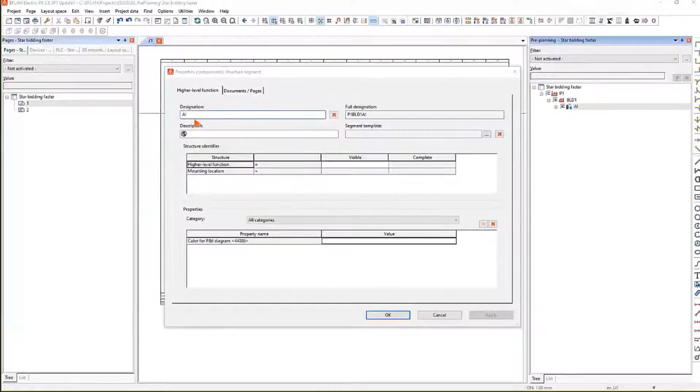In my plant P1, I'm going to create a new structure element. It's going to be a set of buildings. So it's going to be building 1. And in this building 1, I will add another structure, which will be area 1, for example. You can easily modify the properties after they've been used if needed. And in building 1, I'm going to have an area 2. And if you want to, you can even copy and paste an area 3 in there, and the system can automatically help you create a structure very easily. So this is a way to organize the data that you need to create your controls design project.

In area one, I'd like to define a motor system. I need a motor control system, so I need to define that and capture the information associated with it. So in this case, I'm going to create a new planning object. A planning object can really be anything. It can be an actuator, it could be a converter, it could be a machine, it could be a pickup, or you can customize whatever you want. It could be an enclosure, it could be a valve manifold, it could be a conveyor system, it could be a robot, really absolutely whatever you want it to be. You can organize it however you need it to be.

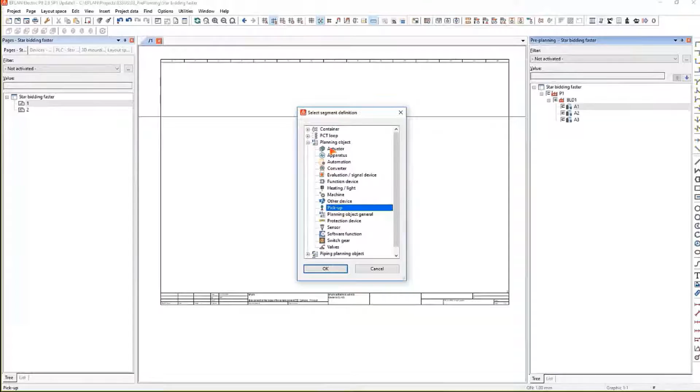So in this case, I'm just going to take a motor, and this motor, I'm going to give it a name, for example, DRV1, drive 1. And this is going to be specific for my conveyor number 1.

In this planning object, we see these different attributes: expenditure construction, expenditure planning, expenditure software. What do these mean? These are to capture times. For example, how long is it going to take to assemble and build that motor onto my system? How long is it going to take to plan that particular motor? And how long is it going to take to program it? And finally, calculation value is how much is it going to cost?

So let's say for this motor, I'm not going to consider just the motor. I'm going to consider the motor plus the cables, plus the terminals, plus the variable frequency drive, and the protection devices all together. And putting that together is probably going to be at least an 8-hour process. So I'm just going to say 8 hours here. For planning the motor, it's probably going to be 2 hours. You have to size it and figure out how long the cables are going to be.

And then to program it is probably going to be an hour to identify the function block and put it in the system. And calculation value, those types of motors with the drive, with everything, it runs at about $8,500, and I can capture a value. Now that I've done this, I can use that drive, and for example, I need one for my area 2, my area 3, so I can easily copy this. I can paste it, and I can paste it in my different areas.

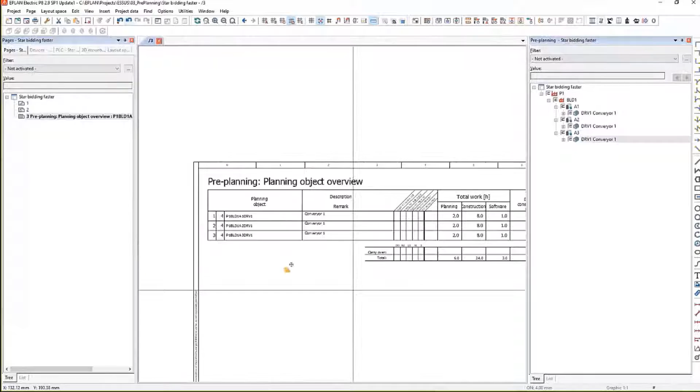And now what's happened is these 3 objects that I created have been summarized in a report, which is my planning object overview. It could be my quote. I've got my 3 conveyors, I got my planning time, I got my construction time, and I've got a summarized value here at the end for total value of my system. So this already gives me a really good idea in regards to the quote that I want to put together. And if you want to add another 10% on top of that, then that could be your final number if you wanted to.

Additionally to that, each one of these drives can also carry I/O information. So I'm going to select all these drives since they're very similar. I can add, for example, PLC I/O. I need an output to start the motor, so it's going to be a digital output. I'm going to start it with contactors, for example. Then I'm going to add 2 more inputs or 3 more inputs for motor start, motor stop, and motor fault.

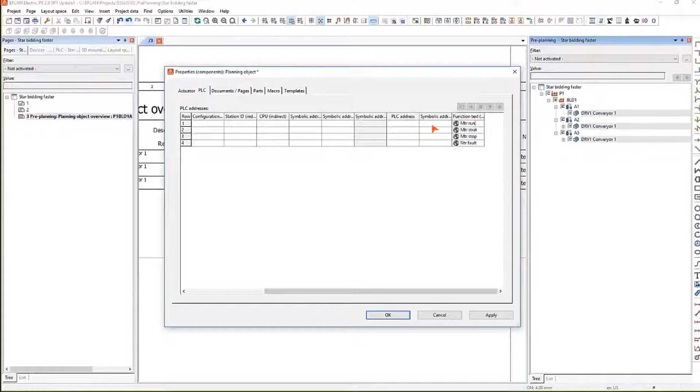So if I want to, I can add also a text: motor start, motor stop, and motor fault. And here I could just have this motor run, for example. So these would be the function text associated to these elements. Now, if I ran my report again, I'm going to update this report. And now look at that. It added all of the signals needed for each one of these objects, giving me a total number of signals.

So right then and there, I don't have a drawing yet. I just have an understanding of the control systems that I'll need. I also have a number of IOs or signals needed for that particular system. So there I can already start sizing my PLC system and maybe go to the various different PLC vendors and ask them what type of PLC could support that type of system.

So there you can see that pre-planning can be very useful in structuring information, but also capturing certain types of information or data associated to the bidding process, allowing you to bid faster by collecting the information faster and making sure that you've defined it faster. And again, if I had a second building, I could simply copy and paste it, put building number 2.

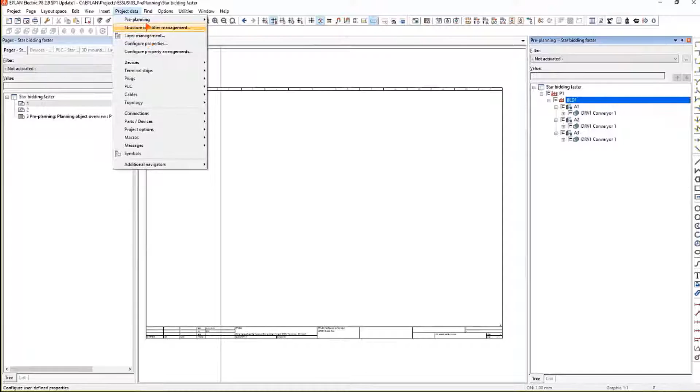Another benefit is we have what we call templates, pre-planning templates. These pre-planning templates can allow you to store a particular drive, like this drive configuration. I could store it in my library of templates. So then when I decide to create a new project, let's say I don't have any conveyors, I'm going to delete these here.

And I want to start defining my conveyors, I can go to my library with all of my templates in there, and I can simply drag an actuator in here for A1, take an actuator, put it in A2, take an actuator, put it in A3, and same is true here. I can just run a report, and there you go. You have your quote already done.

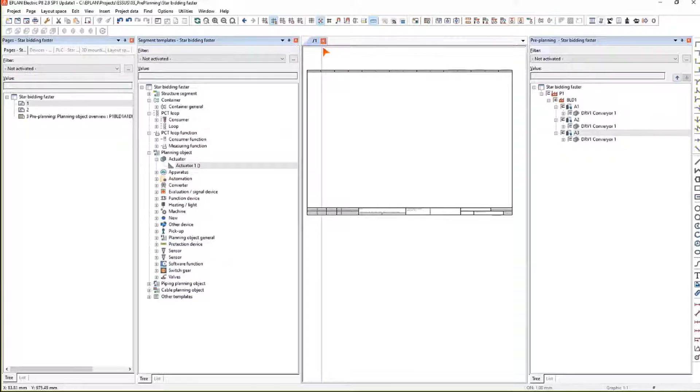So using templates with all of the data already pre-stored can be very useful to quickly and easily put a quote together and generate the information needed for bidding. That is using pre-planning for its structure, for its objects, without doing any design. Let's take a look at a design approach. So again, I'm going to delete all of this. And I'm going to remove this particular page.

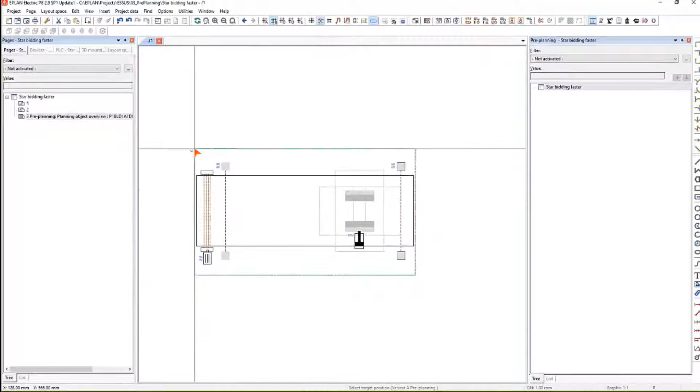And now let's say I need to design a conveyor system for a manufacturing facility. I'm going to start with a conveyor, so I can use a conveyor macro. So now what we're using is graphical objects. This macro contains the conveyor, a motor, 2 light barriers, and a cylinder. By using my tab key, I've got 4 different variations, vertical and horizontal at different positions.

So I'm going to place one system right here. I'm going to place another system right there. And you can see as I place these graphical systems, the system logically captures again the information associated with them. So in this conveyor system here, you've got a cylinder, you've got 2 sensors, and you've got your motor.

And if I look closer to these objects, you can see that the information behind them carries all the information needed for quoting, how much time it's needed to build, to plan, to program, and what it's going to cost. Now I'm going to add a couple of more devices, such as a turntable. I'm going to place my turntable right here.

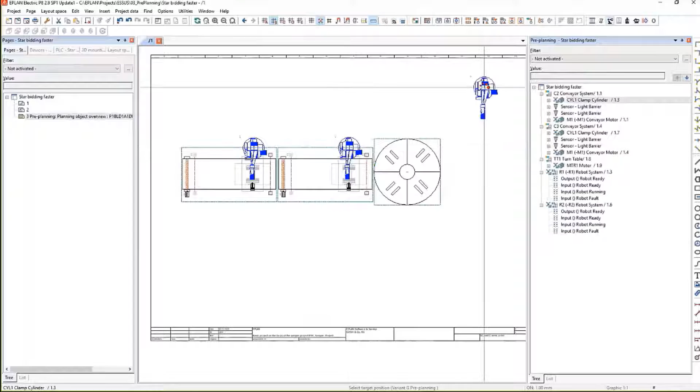I'm going to add a couple of robots. So I've got a robot system here. Using the tab key, I can orient the robot however I need to. I'm going to put one here. I'm going to put one here. And using my tab key, I'm going to put an oriented robot right here and another one down there. So now what's happening is you're doing a graphical pre-planning.

A graphical pre-planning means you're using graphical objects, not just graphical objects, intelligent graphical objects that carry a lot of data with them. And this data can be data regarding bidding or quoting aspects, but also information regarding the PLC layout.

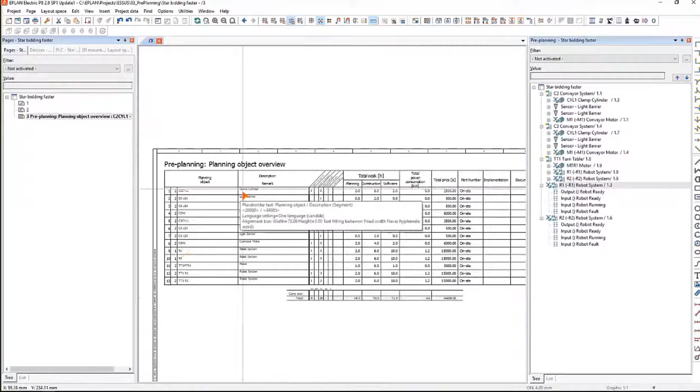So if I just took this system and I decided to go to my pre-planning report, and I would update that report with the new information, now you could see the entire quote or the bid for that particular system. You'd have your cylinders, your light barriers, your conveyors, your robots, and everything is added up to a total sum here at the bottom. And you can see here $84,000 for that system with a couple of robots associated with them.

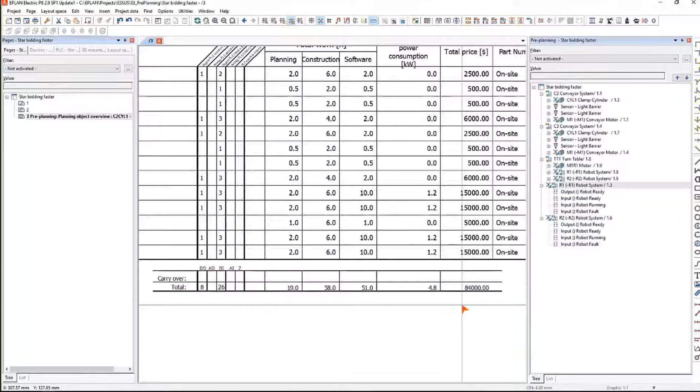So this is just to give you an idea how pre-planning using intelligent graphical objects can really help you leverage speed and accuracy in quoting specific control systems. Now, the huge benefit is not only it helps you to quote it, but in addition to that, if I look beyond the robot system as an object here in my overview, I can see I have macros associated with it. And these macros can show me what the circuit diagram would look like for a schematic implementation.

So not only I have the object for quoting and bidding, but also once I've won the bid, because I'm so accurate and efficient at it, I can also straight away use the information to drive my detail engineering all the way to the panel build and panel manufacturing aspect. So you can add as many different types of blocks.

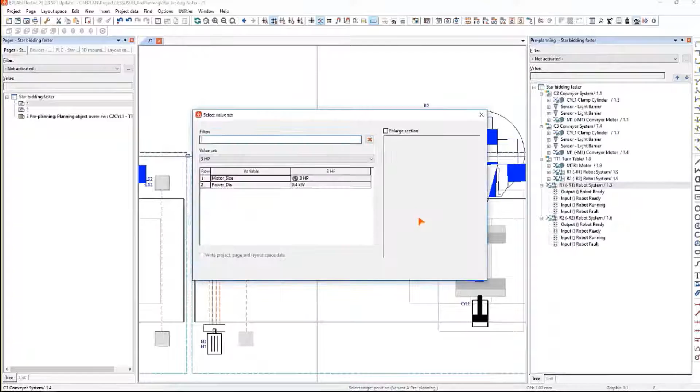Like, for example, I've got a motor here. If I need to add an additional motor on that particular segment, I can just pop it right here and assign that motor to my second conveyor, for example. Just take it there and hit OK. If I had to choose the size of the motor, I could size it right here. And again, that motor could come with a lot of pre-planning information.

I can also select a cylinder. Here's a pneumatic cylinder, and this pneumatic cylinder could also be positioned where I need it graphically, and it also logically is added to the tree or to my structure. I could have some sensors, for example, I need some proximity sensors, and I could just simply drop them here and here, wherever I need them for my particular application.

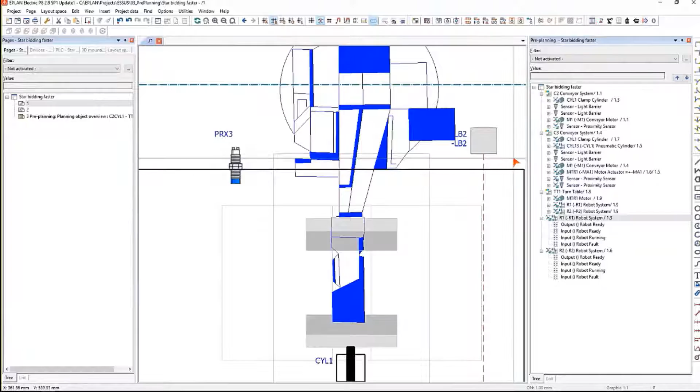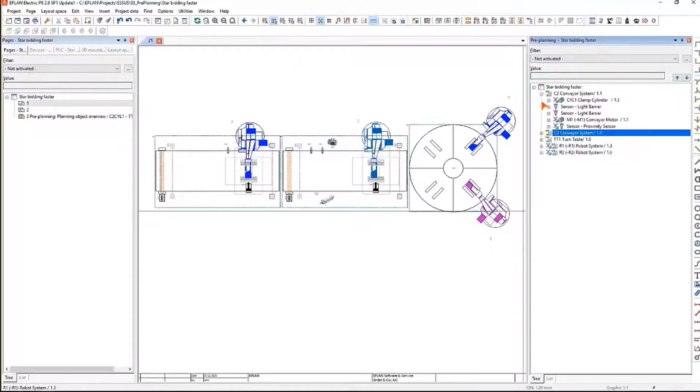So a graphical pre-planning is not much different than what you might be used to today using CAD applications. However, there's a huge difference because the CAD blocks or the graphical blocks, as you understand them, now carry a lot of data with them. And not just bidding data, also graphical data, also logical data, PLC data, and wiring data associated to them. So a lot of information is now tied to these objects and can help you generate quotes a lot faster, a lot more accurate.

And on top of that, by doing that, not only do you have a quote, but you've also got an initial view on what the system could look like. So conversations with your customer can be at a completely different level where he can visually see what you mean by the quote that you just provided, making the whole process a lot easier. So this kind of summarizes the approach of how the Eplan pre-planning solution could be used to help companies or engineering generate quotes or capture quoting information a lot more accurately and a lot more efficiently.

And again, by the fact that you store these objects in templates, that helps you to remove the experience aspect where you have to have that person that's done it multiple times and knows exactly the ins and outs to be able to quote the system. The ins and outs of that person are stored in that particular block in the actuator, and all of the information is there, so the user can just drag that information onto the drawing and leverage that data from there on forward, knowing that based on the library it's accurate.

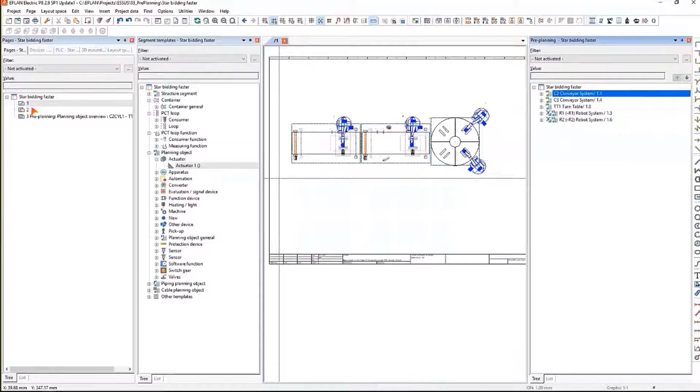Simply, what other software packages are, Eplan in a sense combines into one platform. So pre-planning is one, where you have a specific structured tree that allows you to create objects and intelligent objects up front. The second software tool is Eplan Fluid. In this same environment, I'm just going to create a new page, and this page is going to be page 5, but it's not going to be a pre-planning page. It's going to be a fluid power schematics page.

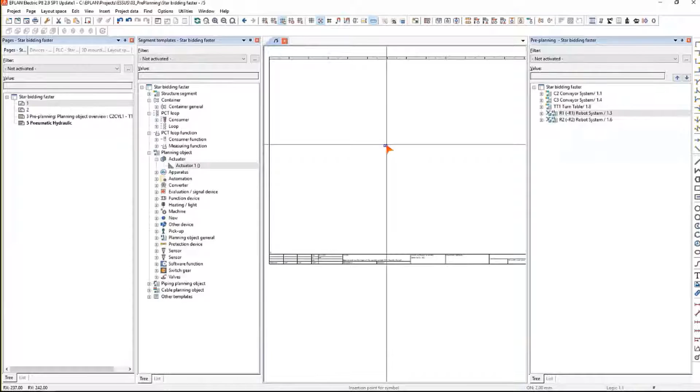So here you could do things like pneumatic diagrams, hydraulic diagrams, cooling diagrams or lubrication diagrams. So here you would just open up the page. I can insert some symbols. I'm going to see if we have all the libraries needed in this case. So here you've got your pneumatic library, and you can see your fluid power library with your valves. Here you have a unidirectional valve, for example, so you can just simply drop it in there, and you can start laying out your entire pneumatic system.

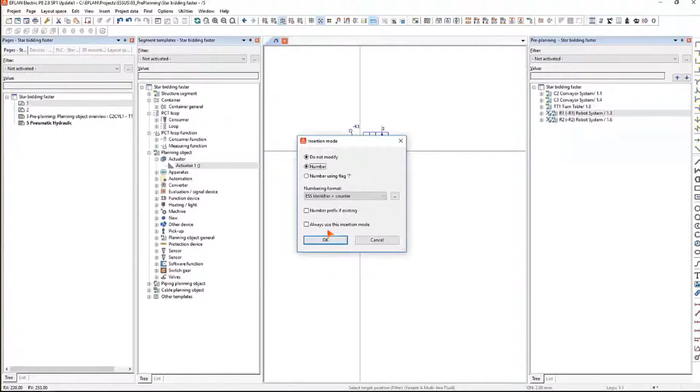You can either do it symbol by symbol, or you can use a macro to start combining multiple different symbols. In this case, I'm just going to place a valve, and then I can select what type of solenoid I'm going to use for it, and then it's going to adapt the symbology associated with it. So now this is not a wire, it's considered a tube because it's carrying air. But behind that symbol, you can also add your part numbers, and you can store all of your information regarding your bill of materials, as well as your components for the 3D layouts.

Then you have your electrical P8, which is your electrical circuitry. So this solenoid needs to be wired up. So if we go to a multi-line page here, schematic multi-line. Now I could go to the devices that I created. There's my coil, for example. There's my control valve. Where's that coil? It's actually here. Now where is it? Directional control valve. Let me go back to my page here.

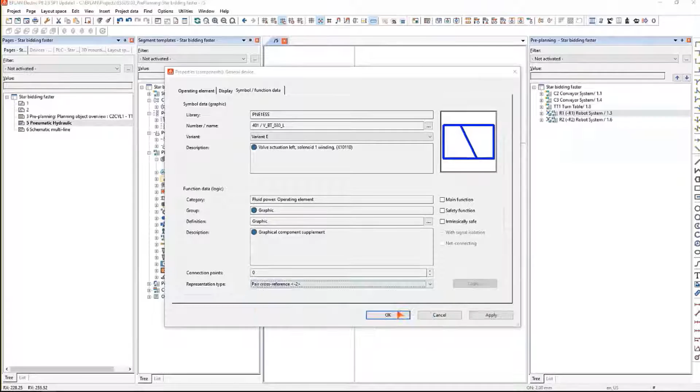Oh, that's a graphical object. I need to change it to a cross-reference. So now I can view that device in here. And this device, I can now use it in my electrical drawing. So if I went to my electrical page, I went back to my tree, I could simply drag this object in here, this one here, and use it as a coil in my circuit diagram.

So the thing is, the platform provides you multiple different software, so you can have pneumatic, hydraulic, electric, and also your 3D panel layout all in one environment. So here, if I create a new layout space, I didn't really change software, I'm just in the same software, but now I can go into my 3D space and design my control cabinet in 3D. So I could insert here an enclosure, select the part number, and drag and drop that component in there very easily.

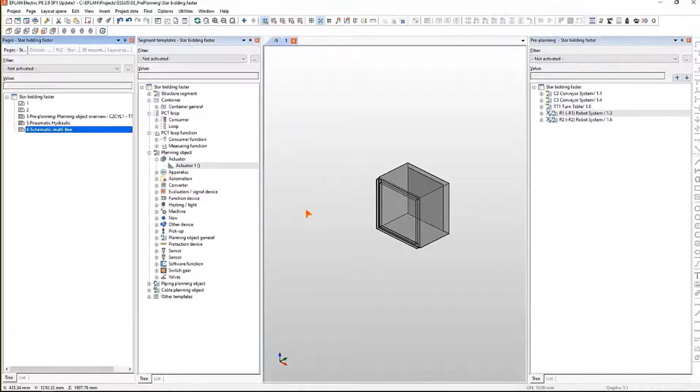Let me see if this has a 3D. Yep. I'll take this part, for example, and there we go. So depending on the detail, you can have more or less detail, but now you could identify the backplate and you can start dropping the components in. So you already saw pre-planning for your preliminary planning and layout of your system, hydraulics, pneumatics, which is Eplan Fluid. You have Eplan Electric P8 for the controls design. Then you have Pro Panel, Pro Cabinet, and those are the major software.

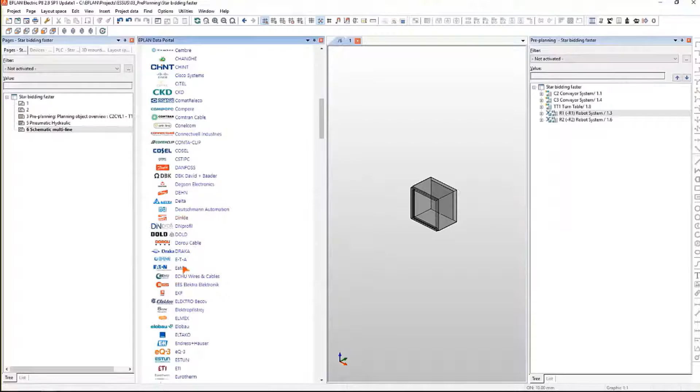You also have Eplan Harness if you have harness design requirements, and you have the Data Portal, of course. The Data Portal provides you with components for your environment. So if I'm here in the Data Portal, I can navigate the list of manufacturers, whether it's Allen Bradley, ABB, Delta or anybody else. Look for parts. So we can go here to Eaton, for example. I can look at the Eaton catalog.

And now we've got electrical products. In this case, we got fuse and fuse holders, and here there's a couple of fuses. So here's the device, and I could use this device directly into my schematics, for example.

So the data portal is another application that ties into this environment. But as you noticed, I stayed always in the same environment, same menus, same layout, just maybe different navigators, different views, different page types that help you to manage the data for your entire control system in one environment.

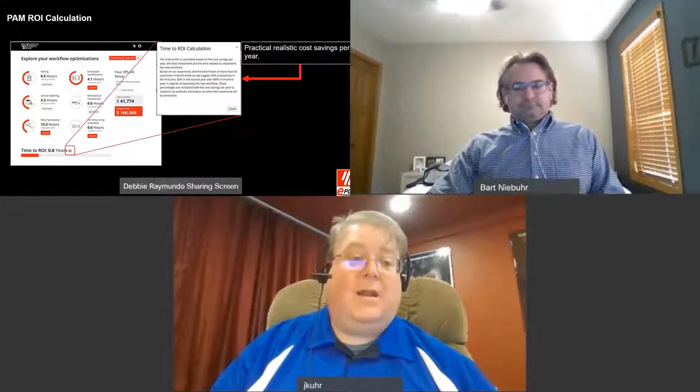So they understand the investment and the importance of it, but they're able to take what they know with your help. Bart, as you know, you've done some process assessments for us, and that really comes through with our customers because you're using their data for them to prove what they will save and gain in the partnership with Eplan and with Werner Electric. And Werner Electric is providing a product management position, so we will have localized support, consultation, and services as our partnership grows. And we look forward to that type of relationship.

While in the model that we're putting forth to our customer to be that valued partner instead of just another electrical distributor.

Perfect. It really kind of goes along with, as we look for that digital transformation within your customers. So just shifting gears a little bit, obviously we're doing this virtually all due to the pandemic, and so we've had to do a lot of shifting. I know Eplan has done a lot with the pandemic as far as shifting a lot of our services, our training and consulting, to be done virtually so that we can still assist our customers. What has Werner all done as the landscape has changed here in the last 6 months to help their customers with this changing work environment?

Well, we've been as accommodating as possible with the customer, like we're doing today, a lot of virtual meetings. So getting used to that technology, but also scoping out other technologies that can really help customers in these types of situations.

So we were all forced into this due to the pandemic, but I think people were already investigating remote connectivity, ways to do things a little more efficiently and faster without having to travel as much. So the time savings thing. Even though the pandemic kind of forced it on us, I believe the trend was we were moving in that direction. So Eplan in particular has a very good way of doing that.

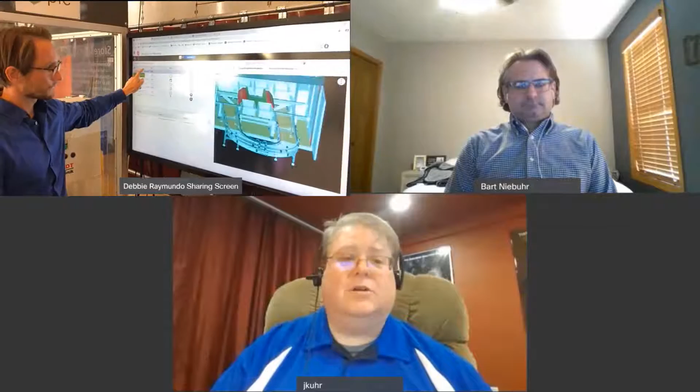IoT will connect everything up. We have a large OEM base looking to monitor their machines more effectively, having to send people out to service the machines less, only when needed. If somebody can troubleshoot over the phone or an internet connection with a video camera to the service tech at the customer, that helps everybody, because they don't have to send a large bill. The service tech learns something, and everything is done more efficiently. So that's a huge part of the solution.

And then when you put augmented reality on top of that with Vuforia and other technologies, you're able to do training better. I had talked about the transfer of knowledge, the old guard leaving, the new people coming in, and how there's kind of a lack of a one-to-one relationship there. So we have to train people better and on the fly, because not only are the older technicians and engineers retiring, but the knowledge they take with them on some of the older systems that aren't quite migrated up to newer platforms is also leaving. So to cover that, we're finding augmented reality type solutions, where wearable devices or even a tablet provide videos with overlays of how things are done, taken apart, and put together—heads-up type displays—really helping people look beyond the old way of training and doing solutions.

The other thing is having insight into your factory. A lot of people are looking at OEE, and have been for a long time, to improve their production efficiencies on the manufacturing end, or even while building machines. That has always been at the forefront, but now with the advent of IoT and more advanced analytics, and things like machine learning and artificial intelligence, Rockwell is cutting edge with their innovation suite.

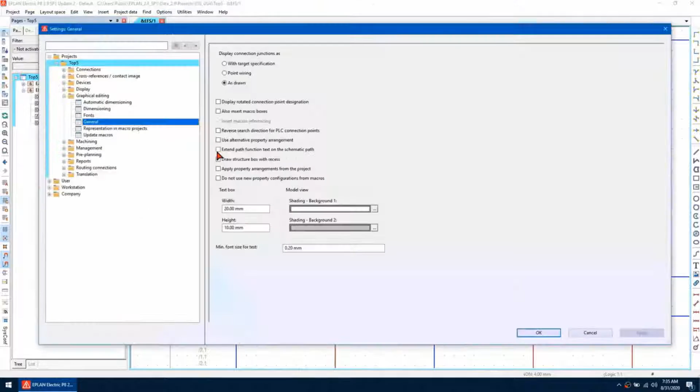So if you go to Options and then Settings, and then we're just going to go to the project and then the name of the project, and then in Graphical editing under the General tab, we want to make sure the draw structure box with the recess is checked. So once that is done, then I just double click on the structure box and then I change the value from the left top outside at 0 degrees to the left top inside at 90 degrees like so. So if I click OK, then you can see that this now matches up.

To make this setting apply for all the new structure boxes I insert, I can just double click on it and I can just toggle one of the values. So I like to just change this from bold and then uncheck it, and you can see that now I can save this. So I'm going to give it a new name, I'm going to call it demo default here, and then if I use it as default from now on and click OK, and if it already exists you can overwrite it like so.

If I click OK, then I can insert a new structure box. I'm just going to give it the same name, so I'm going to call it skid and click OK. So you can now see that this one inserts like the other ones do.

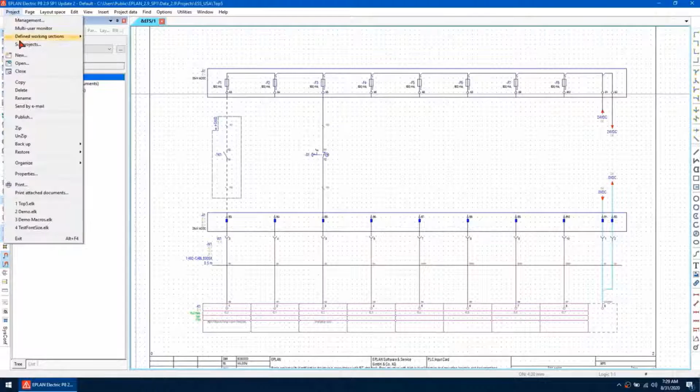How can I create a macro project? So to create a macro project, the easiest way is to take a copy of the project you are working on. So here I'm going to go Project and then Copy, and then I'm going to give it a name, and I'm going to call this top 5 macros. And then I'm just going to go for only interactive pages and then click OK. And now I've got a copy of the project.

The only thing I need to change to make this into a macro project is to right click and go to Properties and change the type of project from schematic to macro project.

When I insert an accessory in Pro Panel, how do I change the orientation? So I'm going to drag this terminal cover in here and snap it to the top, and you can see that the rotation of this accessory is correct. If I try and place it on the bottom, you can see that it does not rotate as expected. So you can manually rotate this by pressing Ctrl Shift R and press it again to get it upside down. And then when I place it, you can see it's going to snap there correctly.

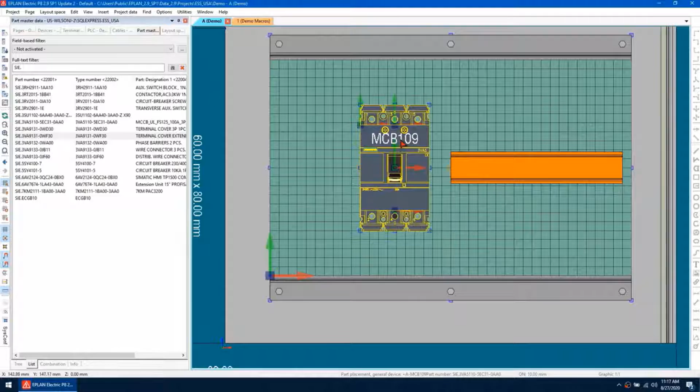We can make an adjustment to this macro, so it will always place the accessory in the correct orientation. So to do this, I can cut this device from the cabinet, and it's going to ask me for a base point. I'm just going to use this one here. And then if I jump to my macro project, which I've got open here, I can go into this new layout space I have created and then just paste it. So it's going to ask me for a base point. It doesn't matter where this is. I'm just going to place it here.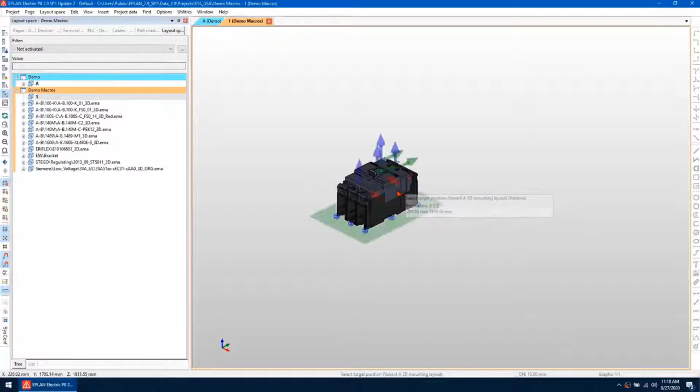And then in the macro project, it's going to show me all the different mounting points on this device. And I can see this bottom one is the one I want to work with. And I can see that the Z-axis is pointing up and away from the device, the Y-axis goes up, and the X-axis goes to the right. So to rotate this, we can just click on the mounting point and go to Edit, Graphic, and then Rotate Around Axis.

So the axis I wanted to rotate around is the Z-axis, so I'm just going to click this one here and type 180 degrees. So once I do that, you can see the Y-axis is now pointing down. So when I insert the accessory, it will be placed in the downwards orientation.

So once I've done that, I can right-click and go on Properties, and I'm just going to grab the macro name here. So I'm just going to select it all and copy. And then I'm going to go to this new layout space and go to properties down here. I'm just going to paste it in the macro name here. So I'm going to paste the name here also, and this is just because I like to organize it by the actual file name. So I'm going to hit OK.

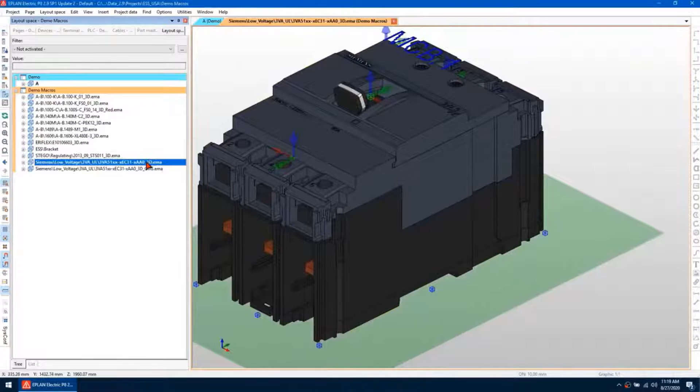And then once I've done that, I can regenerate this macro. So I can go to project data, macros, generate automatically. Make sure you got the overwrite existing macro box checked and click OK. So now when I go back to my demo project and I place that same device, so if I go to devices, mine was MCB109, I can drag that over like so. And now when I place that terminal cover, I can see that it snaps correctly here and also here. So I don't need to manually rotate it now in the future.

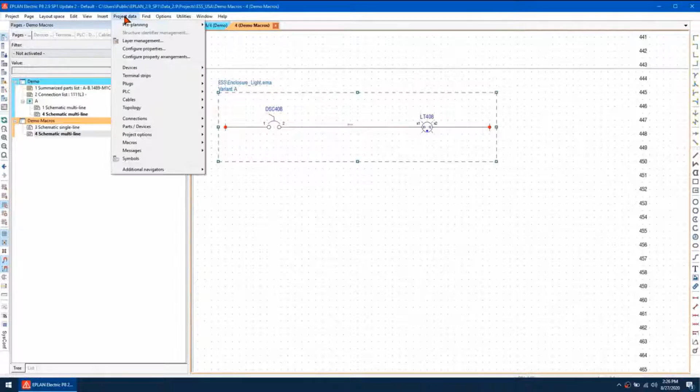I've made changes to a macro, but when I insert the macro, I do not see these changes. I have a simple macro here, and I'm just going to regenerate it by going to project data, macros, and generate automatically. Notice this is variant A. I'm going to go to my schematic project and insert this macro, and then place it here.

I'm going to update this macro by taking a copy of it, and then I'm going to paste it below here. I'm going to make a simple modification to it. I'm going to make it 2 lights and wire these ones up here. Like so. I'm going to change the variant to variant B. And then I'm going to regenerate variant B.

When I insert this new macro, I should have the options of variant A and variant B, but notice how variant B does not have the additional light. So what is going on? So if I go back to my macro project, I can click on the macro box and right click and go to select associated objects. As you see, only this first circuit is highlighted, so that is what is included in the macro box.

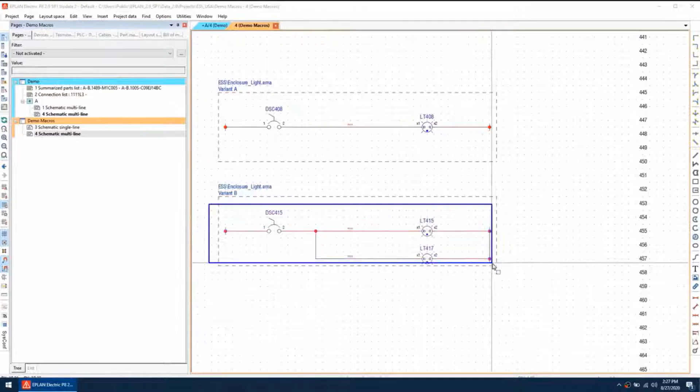We have a few options to correct this. One way is to select everything inside the macro box, like so, and then right click on the macro box and go to assign objects to macro box. So now when I right click on the macro box and go to select associated objects, you can see everything is highlighted. We can also do it a different way. So if I go back a step and change this back to B, and I do my select associated objects again, I'm back to my previous step.

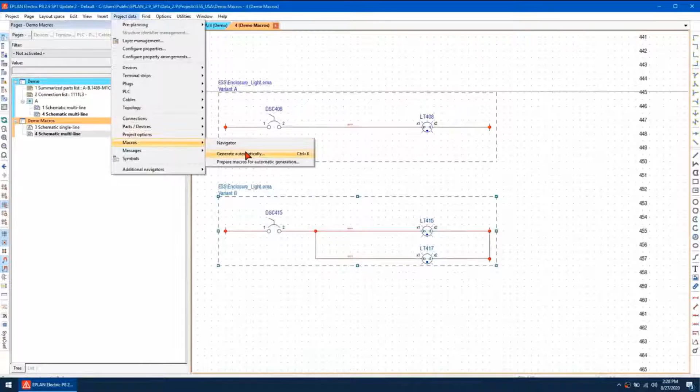So another option is to double click on the macro box and to change this setting here, so manual object assignment. If I uncheck that, Eplan will automatically include everything that is inside the macro box. So if I go to select associated objects here, everything is now included. So I can regenerate variant B by going to project data, macros, generate automatically. Okay, so now when I reinsert the macro, it should be functioning as I expect. So here's variant A and there is variant B.

When I insert a macro with a placeholder object, how can I delete or hide these? So here I have a macro that I inserted from the data pool. It came with 2 placeholder objects that I can use to adjust certain values on this macro. Sometimes it's desirable to hide these, and to do that, the easiest way is to change the layer visibility. So to do that, let's go to the project data and then layer management.

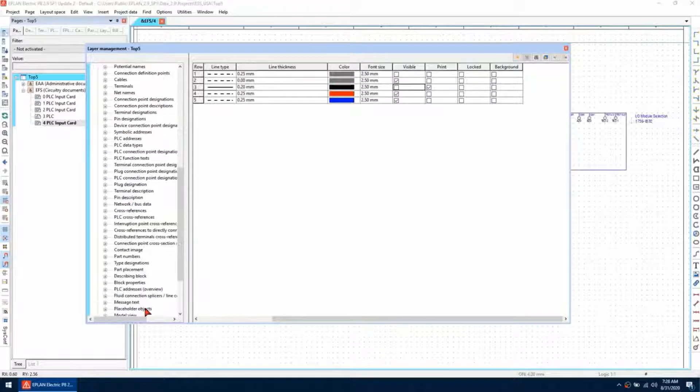And the 2 layers that we're interested in is the macro layer here, so Eplan2020, and the placeholder object. So if I just scroll across to the right here and uncheck the visibility, and then also the property placement for the placeholder object down here, and this is Eplan551. I just scroll across and change the visibility, and then I can close out there, and as you can see, they now turn gray. And if I go to view and then turn off invisible elements, now they are hidden.

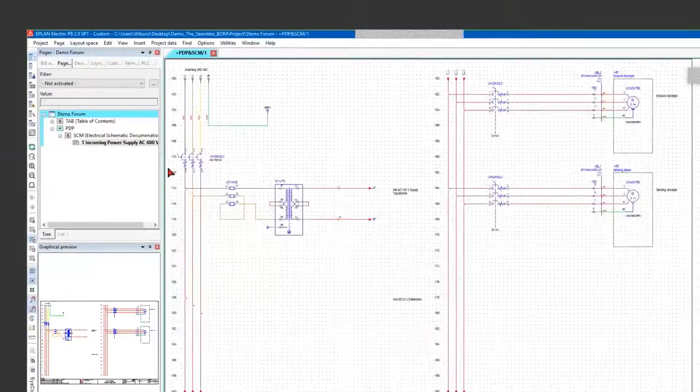So opening up a page here, I'm going to grab this electrical schematic page. And this is just my incoming power. I drew this page earlier and I just placed symbols around. So to insert symbols, these are the very basic steps in Eplan. We can go to insert and symbol, and we can have a look through the large symbol libraries that come shipped as default with Eplan.

We do cover NFPA and IEC, and we've got symbol libraries for them both. Also, if you have the fluid add-on, we can do hydraulics, pneumatics, all that nice stuff. So digging down in this symbol library, I can plus down and navigate, and you can see each one is in its own category. And they've broken them down into easy to read and easy to find symbols.

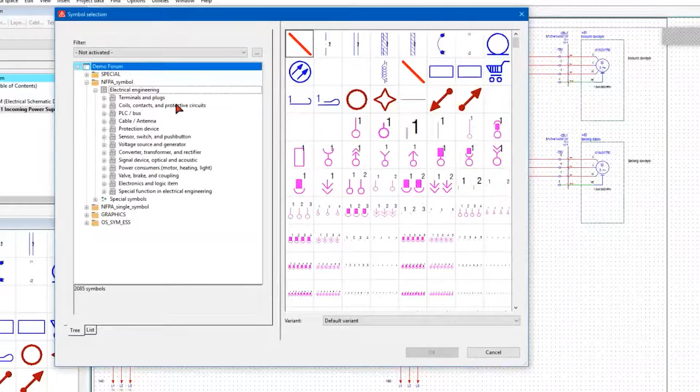So if I'm after this fuse, I'm going to look for this protection device, and I can see all the different types of protective devices. I can still drill down, and I want a safety fuse, and I'm just drilling down and eliminating all the other things I don't need. I want a triple fuse, so I've got these different styles. Eventually I'll get to the one I want. So lots of options for different ways to represent symbols.

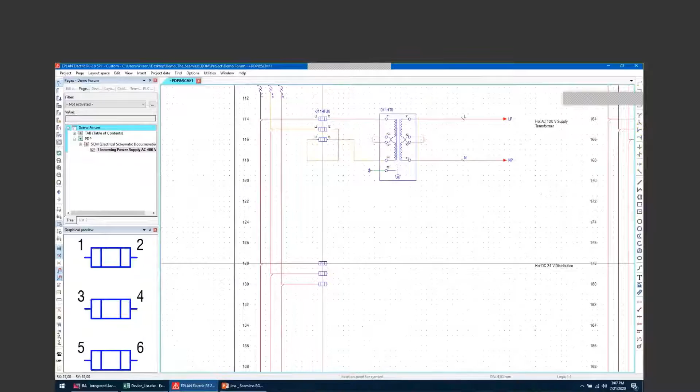So I want to hit OK, and then I want to insert it. This is the auto connect feature. You can see these red lines coming off when I get it in line. I can drag it around like so. So very quick, you don't have to manually draw these lines, it'll just auto connect for you. I'm going to place this device here, and it's going to get a number, 128, because I'm in row 128 here. So auto numbering feature there.

So let's look at the part information that is on this symbol. Right now, since we only inserted a symbol, we don't have any part information. It's very easy to assign the part information by going up here and clicking the three ellipses. When we do that, we can start browsing the parts database. I'm running a SQL database, as you can see up here, SQL Express. It also ships with an Access database. We recommend going with SQL. We can build them out faster, and they can make larger databases with them.

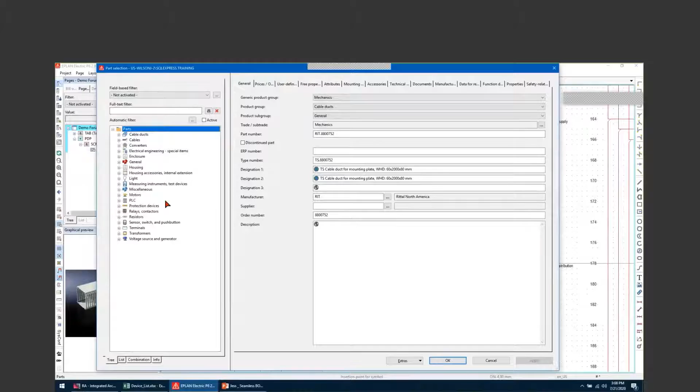So I'm going to drill through my SQL database. It's arranged in this format, and I'm going to use a protective device again here. I'm going to use an Allen Bradley 3-pole fuse holder. In the database, there's a bunch of useful information. You can fill it in as much or as little as you want. So here's all the basic stuff like part number, the manufacturer, the description here.

If we look at the mounting information, we can see we've got some width, height, and depth. So these attributes can be used when you're using 3D components here, and we'll get the right sizes here. We've got graphical macros and an image file that's been attached to this particular part. So all this information, when we apply it to this symbol, we're going to get all of this through.

So let's press OK. So now this part has been assigned to this symbol, and you can see all the information here on the right hand side. So here's the image file I discussed, which has been displayed here. I also have the rating of this fuse holder, so 30 amps. And it's also got the height, width, and depth again, which I showed you earlier. So all this information gets assigned to this part here.

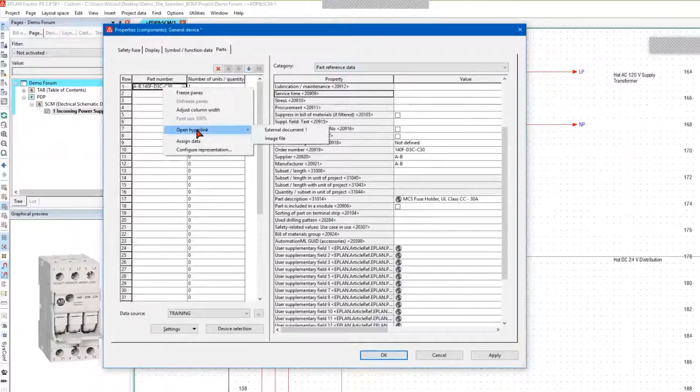We can also have a look at the parts reference data. So this is additional information you can add if you need to make this particular device slightly different versus the part. So we can also right click here and open the hyperlinks that have been assigned to it. So here we have the image file and also an external document. What I mean by external document is maybe a PDF or a website that you can assign as a hyperlink.

So I'm going to click here and it's going to bring up the data sheet here. So this is good to see. You don't have to go hunting for the data sheets anymore. You can instantly just grab them and have a look when designing your system. So I'm just going to close that, and then I'm going to assign some fuses as well. So I'm going to do the same. I can go back in my parts database and grab this Eaton fuse, click OK. Let's change the quantity up to 3 since we're in a 3-pole fuse holder, and then click OK.

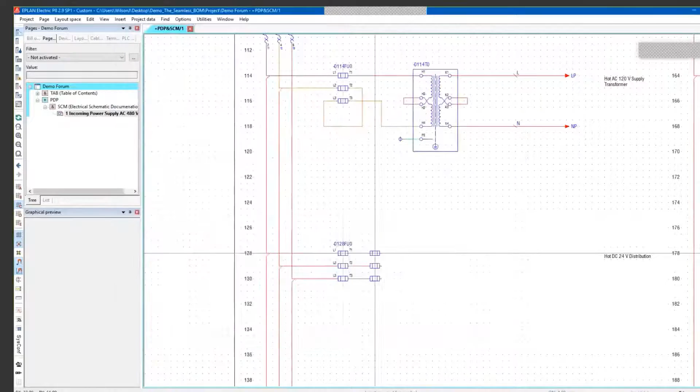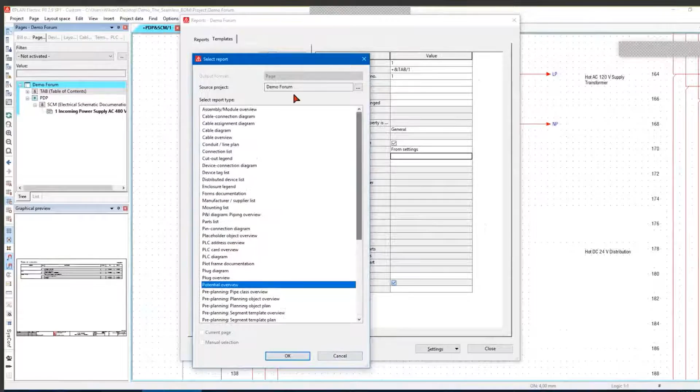So if I generate my bill of material now, so I go to Utilities, Reports, and Generate, I've already pre-populated this particular template with some reports. So if I use this new button, I can see all the other types of reports that Eplan comes with. So we can do a connection list, a parts list, a potential overview, terminal diagrams, PLC diagrams. There's a whole host of different reports we can generate here. So very flexible. Any report you can think of, we pretty much have.

So I want to create this summarized parts list. So I'm just going to click on it and use this generate report. So it's just going to scan through my project and find all the part numbers that have been assigned. So let's have a look what we've got so far. So right now I've only got one part in my project, which is the fuse holder I added and these fuses. You can see that on this particular report I've added a QR code.

So this QR code is hyperlinked to the data sheet which I showed you earlier. So scanning with a QR code reader, maybe a mobile phone, will take you to that particular link. So I can do this in Eplan by holding down Control and clicking. So as you can see here, it's opened this browser page with the data sheet here. These forms, these reports are all customizable, and I'll get onto that later, how we can adjust these to show additional information if we need to.

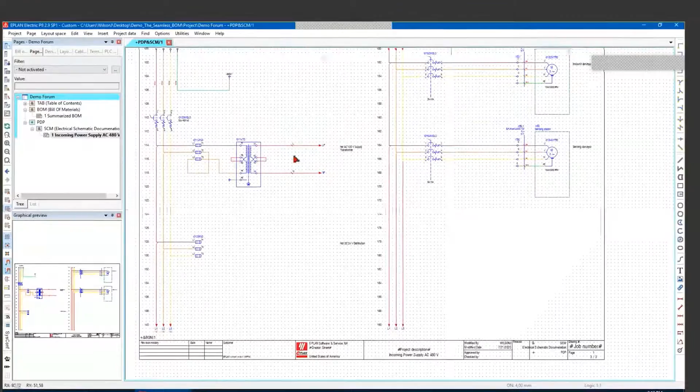So let's carry on adding parts to this page here. There's different ways. I showed you this first way. We can also add a part to this fuse holder in a slightly different method. So if we go to the parts tab again, we've got this tab down here called device selection. If we click on it, Eplan will scan the entire parts database that we have here, and it'll compare it to the symbol that we inserted. And as you can see, it's suggested 3 parts here.

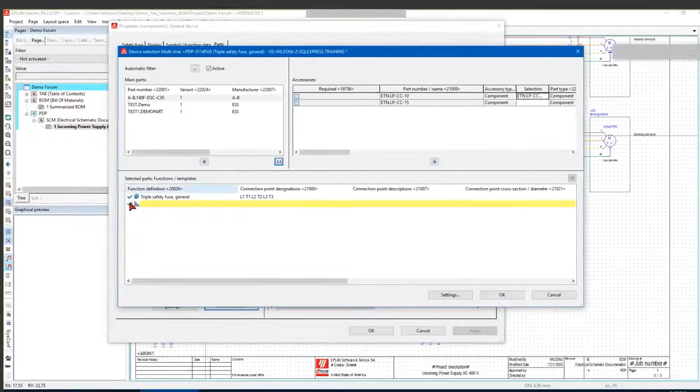So I want to use this first one here and click on it. And what happens here is it matches it up, says, okay, that looks good. And then it also suggests me some accessories. So I've got 2 different types of fuses here. So I want to use this 10 amp fuse. So just by clicking on it, it's going to bring it down here. And then if I use these arrows here, it's going to give me a check mark saying, yep, you're good to go. So I'm going to hit OK. And then let's just change the quantity up to 3 here.

So jumping back to my bill of materials, I'm going to start building this up. You can see my fuse holder now is up to 2, and I've got 6 different fuses going on. So Eplan is constantly scanning the project, looking for any changes and updating all your reports, so everything should be in sync.

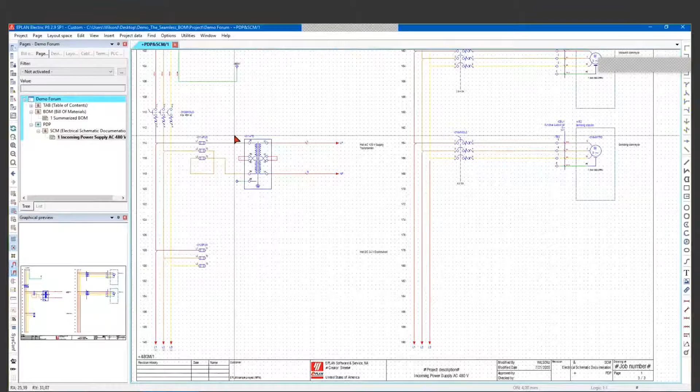So I've shown you 2 ways to grab parts and add them to symbols. Let's look at grabbing a complete device. So instead of inserting symbols, let's grab something from Eplan's data portal, which is an online repository where we have lots of parts, up to nearly 1 million parts right now, from 300 different manufacturers. So the manufacturers go on here and upload all their parts and fill out all the parts data information that we need. So this could include the dimensions, the 3D files that you need, the images, the descriptions, the part numbers, everything that you can think of to do with a part.

So I'm going to browse Rockwell's here. And what's nice about the data portal is they give you an option. So looking at the Eplan catalog style, you can see this is Eplan's arrangement, but we can easily switch this over to the Allen Bradley style. So this is how Allen Bradley arranges their components in their catalogs.

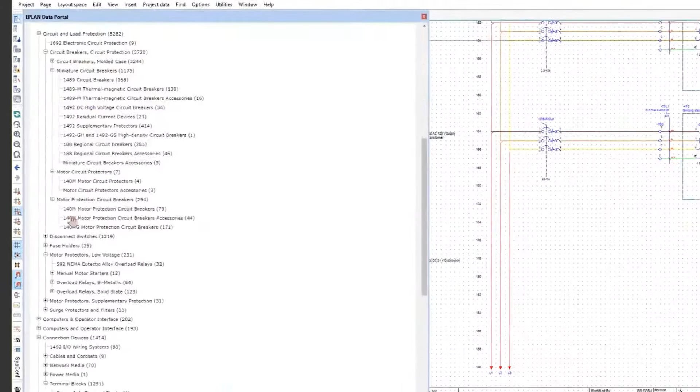So I want to grab this circuit breaker, and I'm just going to look for a 6 amp, I think, and I'm going to insert the part here using this symbol. So I'm going to grab it, and Eplan's going to say it already exists, but let's just overwrite it. And you can see it's attached to my mouse. So just moving over here, I'm going to place this part here. So I'm just going to drop that there.

And as you can see, we have all the data from the part from the data portal. So let's just click here. And you can see that we've got all the information here. So all the parts data, you can see it's a mini circuit breaker. We can see it's Allen Bradley, single pole, all the other information, the sizes. We've got 3D macro here. Okay, so let's close that.

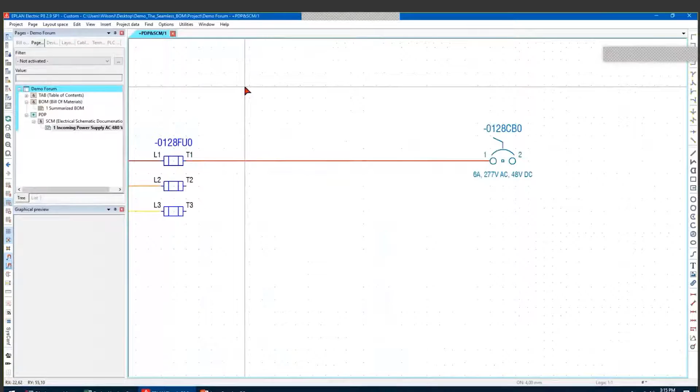So whenever we download a part from the data portal, it will automatically place it into your parts database so you can use it on future projects. So once we have them already downloaded, we can look in our parts database by going to Insert and then Device. So I'm going to insert a power supply, which I downloaded earlier from the data portal. As you can see, this is what it would look like. So let's hit OK. And now it's attached to my mouse. Using the Tab key, I can just rotate it to the direction I want. So I'm going to place that one here, and then I'm going to number it.

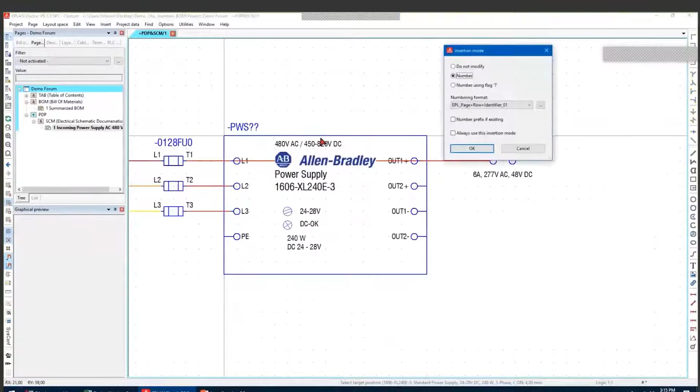So I'm starting to build up all my parts in this project. My parts list is beginning to grow. You may come across an issue where I may have missed a part when I've inserted the symbol. So I know for a fact here I don't have a part number on this particular transformer. So I'm missing a few here. Eplan can easily check this by looking at the bill of materials navigator. So we can go to project data and then parts and then bill of materials navigator here.

So if I just look in here, I'm going to have the parts I've already got in my project here. And I can also look at this one here, so any parts without part number. So I've got some motor overloads, which are over here. So if I just plus down, you can see I've got 3 in this case. So these 3. I've also got a transformer without a part number.

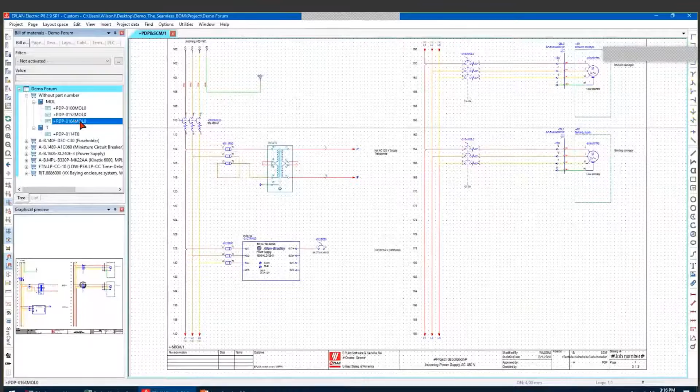So to rectify that, what I can do is I can assign them. So I can assign a part number to this one real quick from this navigator here by easily right-clicking and going to device selection here. And this is the same window we saw earlier. So Eplan is scanning the parts database and giving me suggestions. So let's grab this B63 and bring it in like so.

So that's brought it in, and now it's got a part assigned to it. Working through this, I can simply repeat those steps again, or we can import a device list.

This list I've made in Excel, but it could have been provided as a customer's parts list and converted into the format we need. Here I'm showing all the device names, part numbers, and quantities. Once we've got it in this format, we can import it into Eplan, and this is pretty flexible.

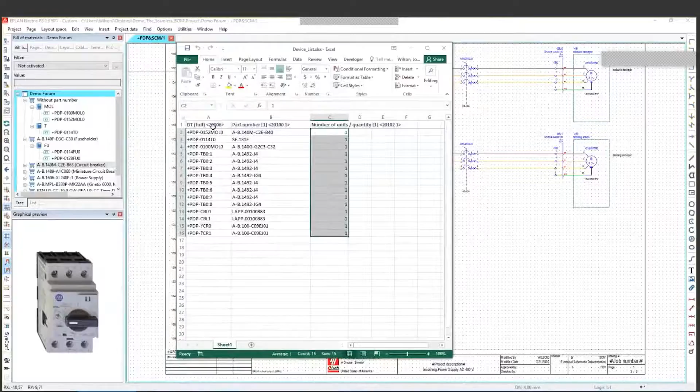We just go to project data, devices, and then import. It's going to look at the Excel file I was working in and see what devices are defined in there. It just needs a minute to think.

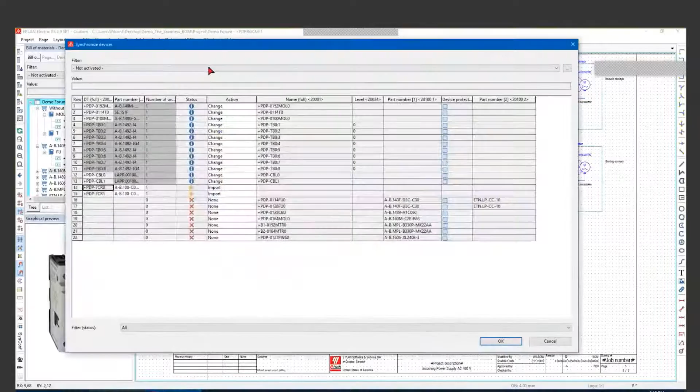Now this window has opened, and it's looked in the Excel file and seen what parts we created with the DTs. We saw that these ones already exist, so we're going to change them and give them a part number. That's what these status markers mean here - we're assigning part numbers.

For these ones with the yellow star, these are new devices that didn't exist in the project. Eplan is going to import them and create new devices, so they're available for us to use later on. I'm going to do that and click OK.

The import has been successful, so now I don't have any symbols without part numbers assigned to them. Let's go back to our bill of material - you can see we're growing this thing out.

Let's look at how to get parts into our project using a different method. I want to use Rockwell's Integrated Architecture Builder here. I'm going to finish this rack I've been laying out in IAB.

You can also use Siemens TIA Portal, Phoenix Contact, and I think Mitsubishi has one as well. They're all just system configurators. You can add parts in here and seamlessly transfer them over from these software packages into Eplan.

We're going to use the Automation ML format to do this - I'll show you that in one second. First, let me finish up this rack.

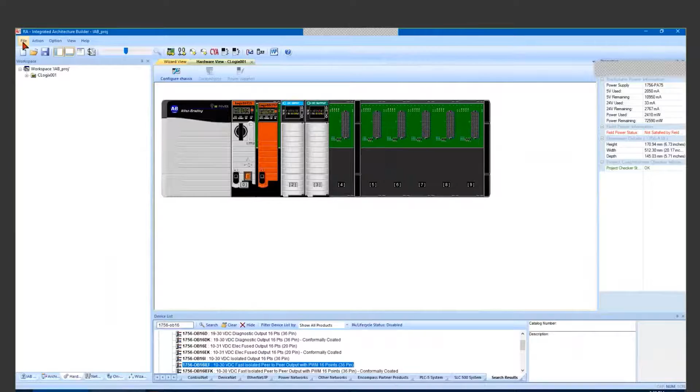Once I'm happy with my rack, I can export it to Automation ML. This format is a markup language that different manufacturers have started to adhere to, a language every manufacturer can speak. Instead of having proprietary languages that only one manufacturer speaks and having to maintain them, they all agree to use Automation ML, so data is easily transferred between them.

So I've exported this file, let's import it into our Eplan project. Let's go to project data, then PLC, then navigator. In here right now I don't have any PLCs, but let's import it - go to PLC, then import data. I'm going to grab the file I created earlier and click OK.

I'm going to import all that PLC information - I've got 5 devices and 2 CPUs. Let's click OK, and you can see I now have my PLC information here, which matches up with my IAB project.

So again, I'm creating data and seamlessly transitioning between software packages here. If I just update my bill of material, you can see I've got these parts already assigned to it. That's great - I don't have to maintain these manually, and I know it's always in sync.

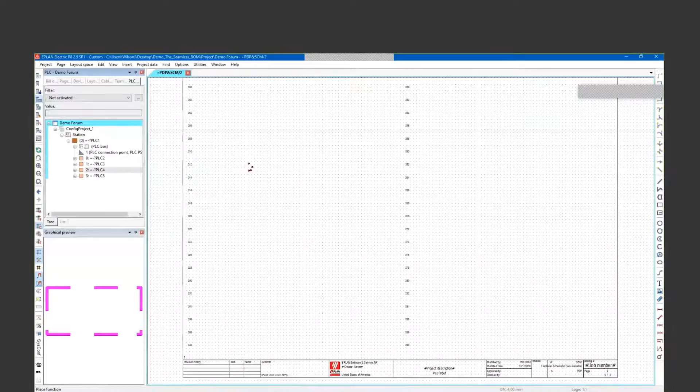Let's create a new page and just grab that PLC input card. If I go back to my PLC navigator, I can grab slot 2 here, which is my PLC input card. I'm just going to place that there, which is great.

You can see how fast I can start generating schematics here. I'm going to place my output card over here also - again, these come straight in from my IAB project. I don't have to draw anything manually at this point in time.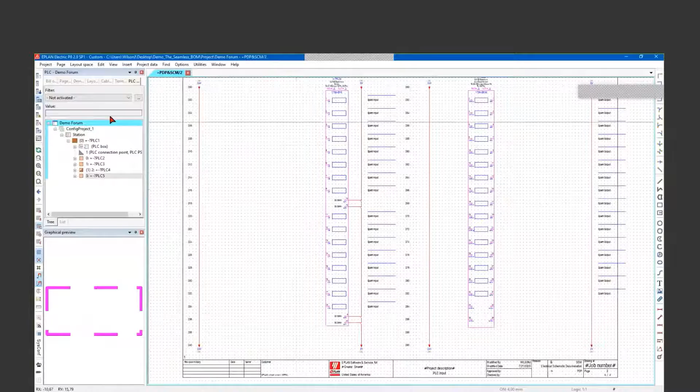Okay, so I talked earlier about how to customize these and how easy it was to customize. What we can do is go to Utilities, Master Data, Form, and then Copy. The best practice is to copy the original form, so I'm going to find my summarized parts list here.

I'm just going to navigate to it - summarized parts list, and it was this one here. Let's open it and make a copy, and let's rename it Demo 1.

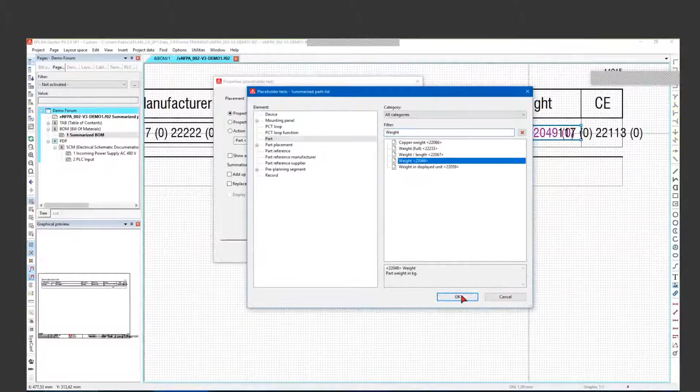And what I want to do is change this UL field to be the weight. I'm just going to double click and change this to read weight, then copy it and paste this text here and run a total down here. So easy to do - we just double click on this particular property and change it from the UL certification over to the weight. So if we just type in what property we want, which is the weight in this case, and stick it in here, then we can see this summation box.

In here, we don't want to sum it up, so let's click OK. But where the total is, we want to sum everything up. So if we double click on this one and go to total, this form should now work when I want to sum all the weight up.

So if I close out of here and go modify this report, instead of using the default form, which is blank right now, I'm going to use this edited one here and use this generate report to update it. So what you can see now is my column reads weight, and I'm totaling all the weights that I have in my project right now and displaying it down here.

So modification of forms are very easy. Eplan comes with a bunch of built-in ones for ideas, but to modify them is very basic also.

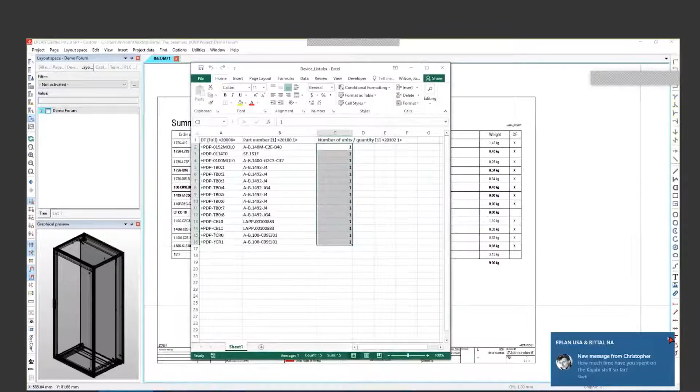So let's look at some 3D environment stuff. Eplan is great because you can work in either different methods of working. You can draw your schematic first, you could import that list I showed you, this device list, or you can also draw in 3D also. So let me show you that workflow.

So if we open this cabinet here, I'm going to just show the mounting cabinet here. This is the mounting plate where you place all your devices. Let's look at the front of it. I'm going to begin placing some stuff.

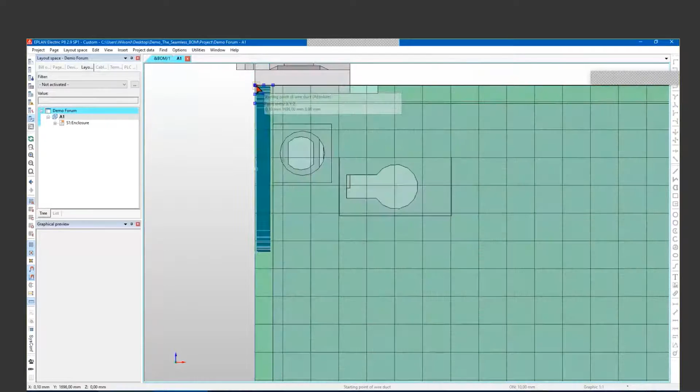So let's place some wire ducts to begin with. Again, it's just drag and drop - you don't have to be a modeling expert at this. I'm going to place that there, and let's just drag this one down here, and then place this one here. Let's go to that length here also. And then let's grab another piece of wire duct actually, and close this up.

And then let's add some DIN rail in here. So I'm just drawing relatively quickly here.

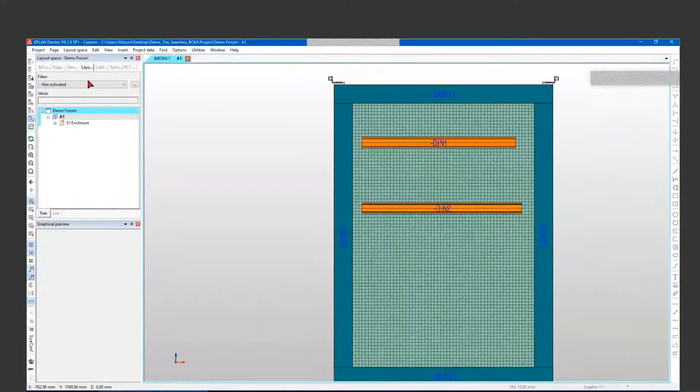So what I can do is, when I imported my devices from my list, I had these control relays which didn't exist in my project. So I can go to my device navigator over here and have a look at all the different devices in my project - this is a list of them. I know these ones aren't placed in my schematic, but I can just drag and drop them over here.

Cancel that, we don't need drilling. So this window here is asking if I want to assign a drill pattern to these. I'm putting them on DIN rail, so I don't need any drill patterns. So I'm placing from the device list that I imported from my Excel sheet.

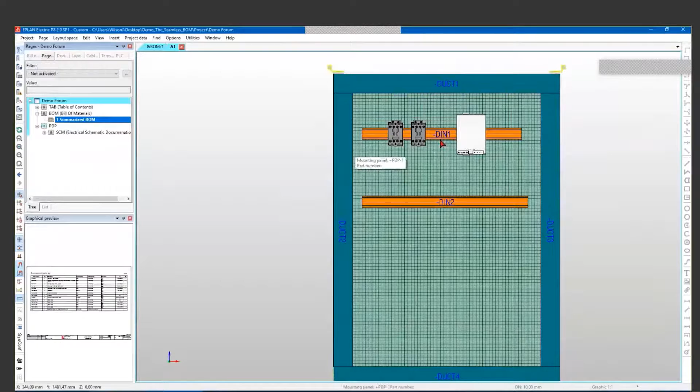You can also work how I did earlier by going to Insert and Device. So if I grab that power supply and stick that on there also, all the while my bill of material is in sync, so this power supply should have two of them working now. So if I just update this, you can see I've got two power supplies now.

So if you're working in 3D or working in 2D, it's always calculating what's going on and everything's always in sync. So we can generate some other reports. This summarized parts list is probably great for purchasing departments - you know, what total quantities of devices do we want? But this isn't particularly great for the wireman, for instance.

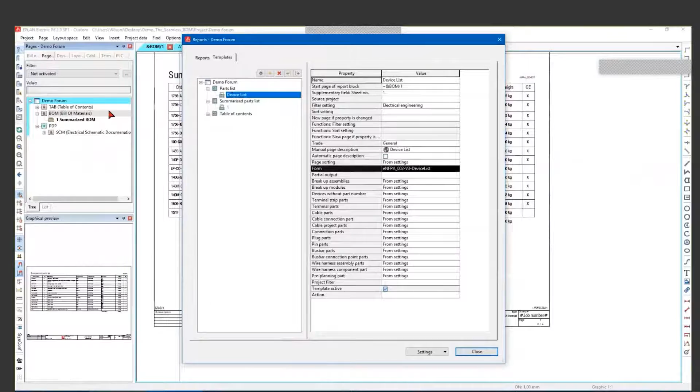So let's see what else we can create for the wireman. If I go to my utilities reports and generate, I've got a parts list which will show us individual device lists, and also we've got table of contents here as well. So let's generate that parts list here. This device list shows us the device tags of all the devices and the associated parts. So this would be, if you're trying to label all your devices, pretty useful for that.

And I also can generate a 3D report. So this layout here, which I've done in 3D, I can generate from a report by going to Utilities, Reports, and Model View. So this is your Model View report generator. So if I just use this one here I made earlier, do generate report.

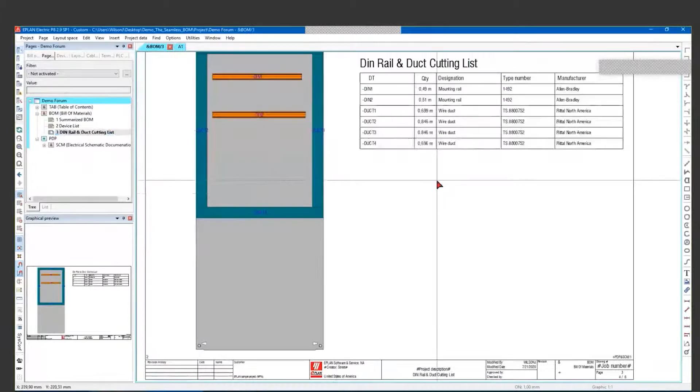Now I should have a new page for my DIN rail and duct cutting. So here I've just created a quick report. This is just a bill of material, and all I want to show is the quantity and length, the length of each duct, the length of each DIN rail. So I can hand this to my wireman or my panel manufacturer and say, hey, look, these are my lengths of my ducts, these are part numbers, this is the length of the DIN rail. Just cut it to length and then bolt it on the back pan.

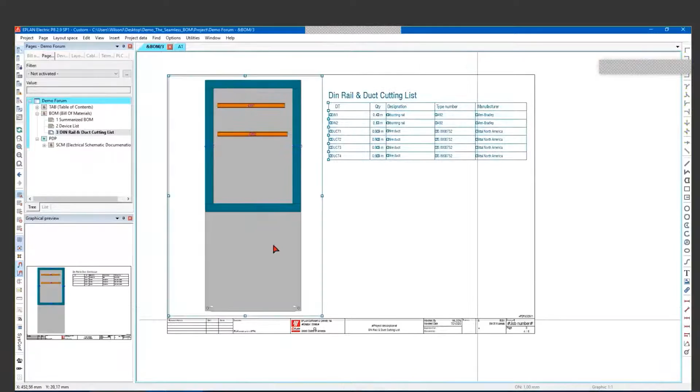Saves a bunch of time. They don't have to grab measurements from the drawing and look at it. They can just say, hey, this one is that length. So really easy to create this, and this is no extra work. I didn't have to manually label anything. It's from the 3D layout where I drew it, and everything was assigned to the parts. So automate as much as you can and you'll save yourself a bunch of time. And these reports can be generated for different people throughout your business.

We can also export all this information to XML, text files, or Microsoft Excel, and we can import them into other software from there. So let's have a look how to export this parts list. We can just go to Utilities, Manufacturing Data, and then Export. So here I can see I've got my settings already preset up here, and let's just take a look at what's in here.

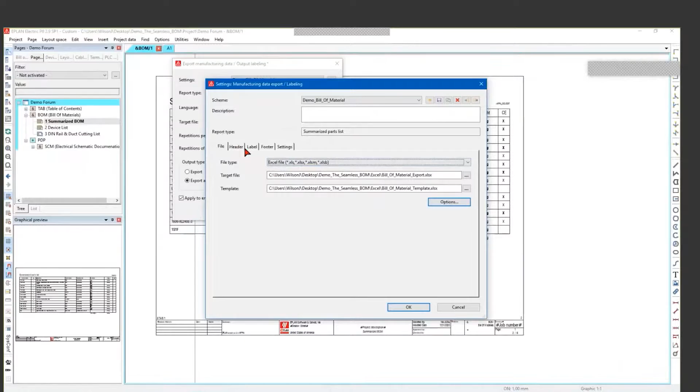So right now I'm using an Excel file. I've got a template set up here, and the template is very simple for this one. And then my target file, so where it's going to go. There's also some other information you can get set up here. So let's just click OK, and then I'm going to press OK right now, and then overwrite the file I created earlier.

When we wake up in the morning, the world has changed again. And if change is the single constant of today, whether in automation, digital transformation, mechatronics, or electrical engineering, we should take change as what it is.

Chance. Our mission? We want to design the future of engineering. Designing the future means being open, open to everyone and every idea. We connect engineers, systems, data and disciplines worldwide for machine and panel builders.

Designing the future means empowering. We empower engineers all over the world to realize their ideas. Our tools and solutions enable you to maximize your efficiency, customized to your needs, from simple to high-end.

Designing the future means being future-proof. We lead the market with more than 50,000 customers and with 19 languages. We offer local support in more than 50 countries. This makes us the global partner for you and your future success.